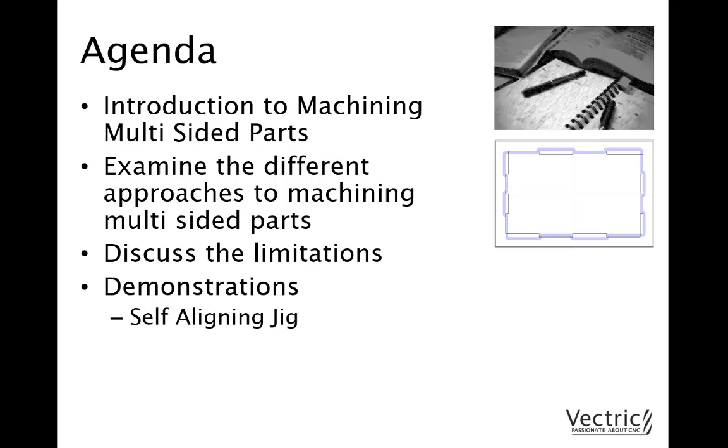We'll have a look at 3 demonstrations: the Self Aligning Jig, 4-sided machining just using 2D toolpaths, and 4-sided machining where we import third-party 3D data.

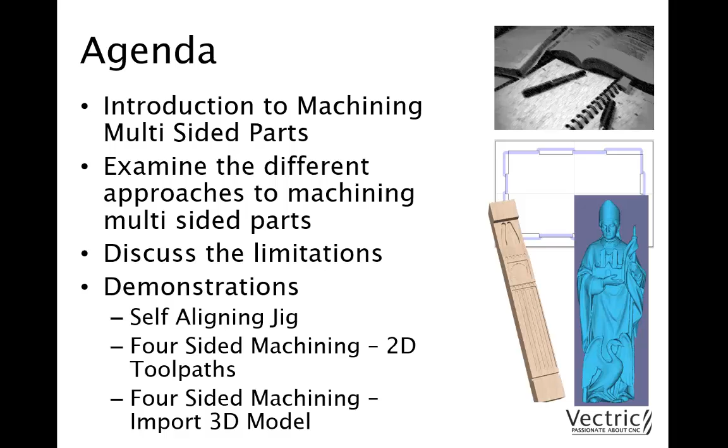So what is a multi-sided part? A multi-sided part is anything that has more than one face. Let's have a look at some examples.

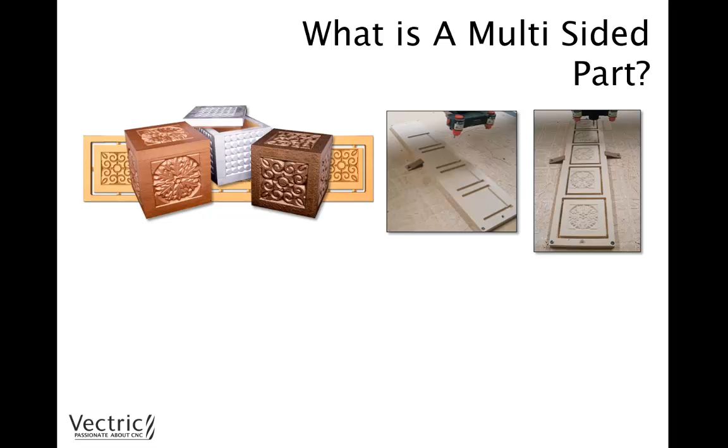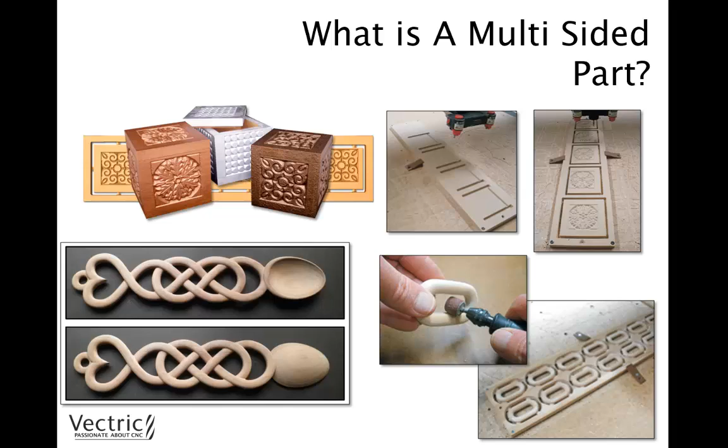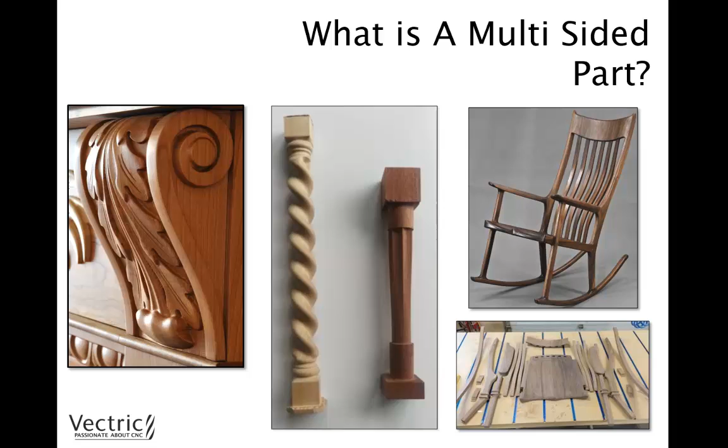Then we have a customer, Russell Crawford, who has kindly posted this on the forum. We actually did a case study with Russell on the Maloof chair. Now this Maloof chair is made up of a combination of single, 2-sided and 3-sided parts and then assembled together. And so you can really see how you can make relatively easy to quite complex looking parts like this using multi-sided machining.

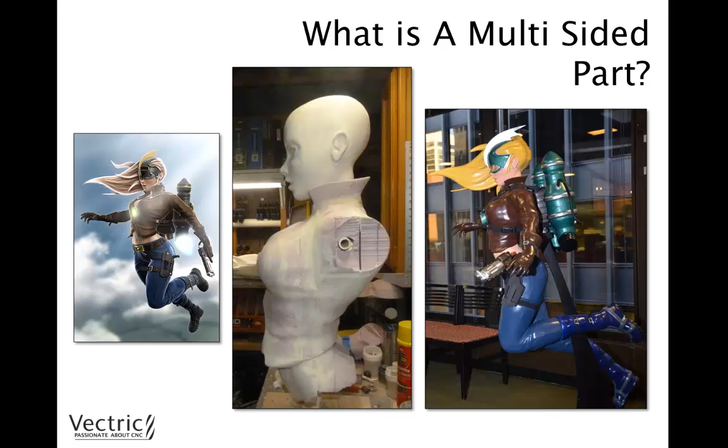So why should we cut multi-sided? Firstly, we're able to make more interesting projects than regular one-sided parts. For example, we can create toys, furniture, household objects. You could also take a standard sign or a plaque and turn that into a 2-sided part, where you add toolpaths to the underside in order for you to fix the part to a wall, for example.

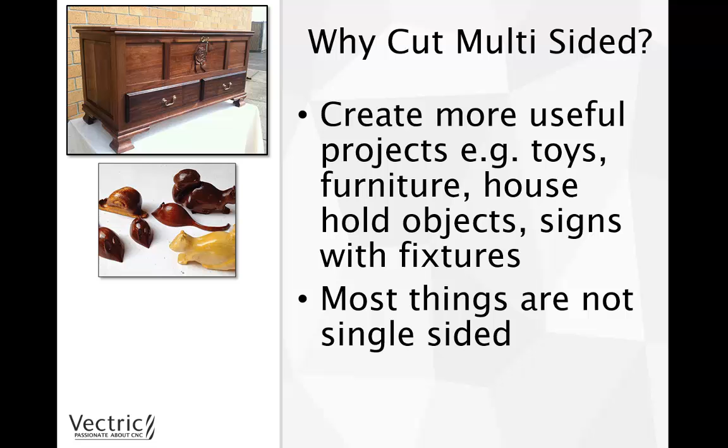Now if you think about it, most things have more than one side. And so understanding how you can approach multi-sided machining makes your machine a lot more flexible. We'll be discussing the different approaches and things to consider with machining multi-sided parts within this presentation.

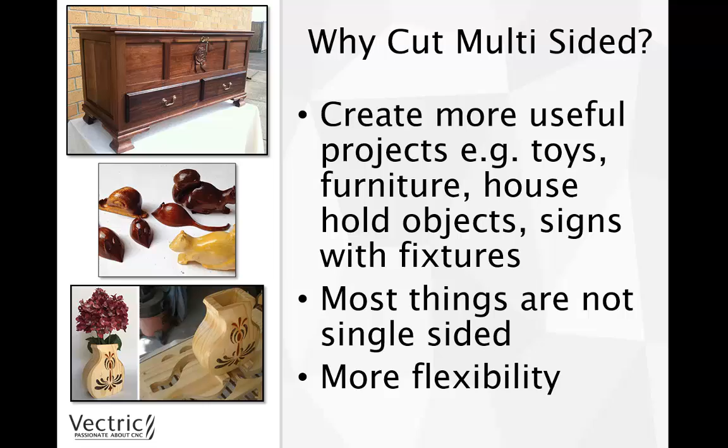Now before we think about how we can tackle multi-sided jobs, let's just take a moment to think about some of the things that we're concerned with when cutting a standard single-sided job. Firstly, we always ensure that the software setup matches the physical setup of the material block and the positions on the machine bed. So we're looking at the size of the part, the material, and our X, Y and Z positions.

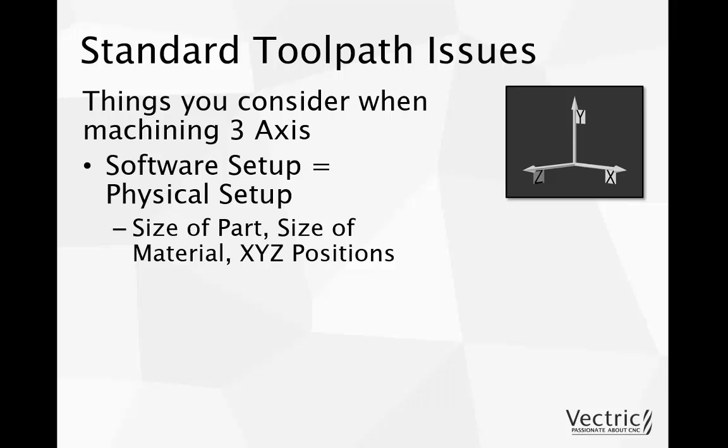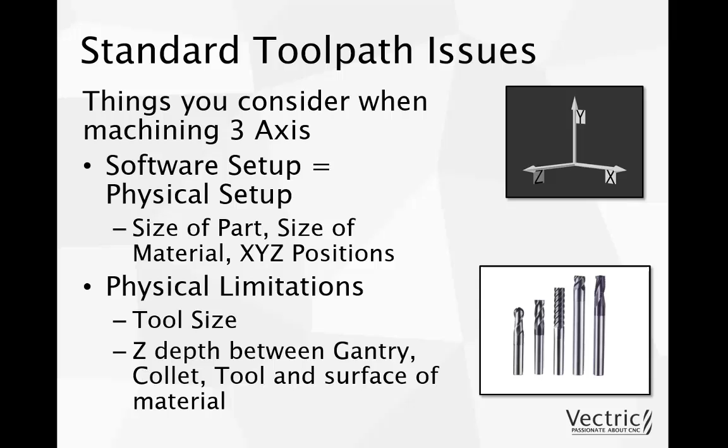Secondly, we think about the physical limitations. So we think about the tools we're using, the size of them, and making sure that they're safe to use with the material that we're working with, where we would consider how much Z depth we have to cut. So what do we need to think about when dealing with parts that have multi-sides?

First is our alignment. So how do we get accurate registration for each side? And more importantly, how can we do that when we can only preview a single side at a time within the software?

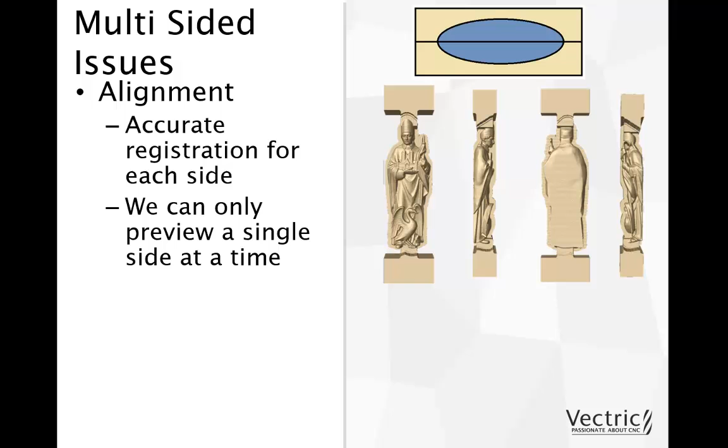Then we need to think about the material. Material is another key thing to think about when dealing with multi-sided machining. We need to think about the size of our material and be wary of the limitations when cutting a block of material—thinking about your tool size and the amount of space you have. Then we also need to think about how we hold the part down.

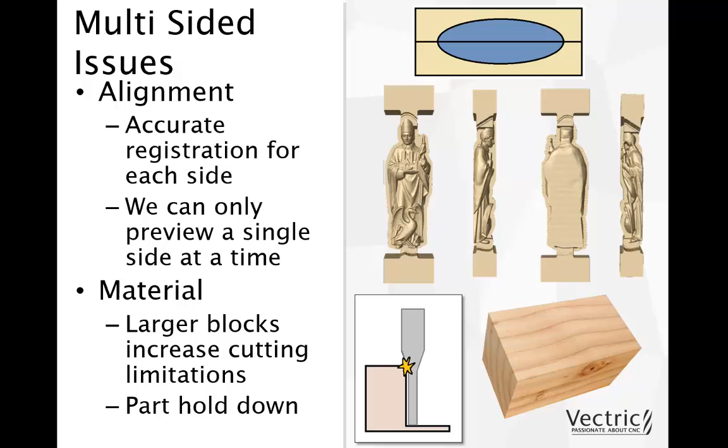We'll be talking a lot about alignment and material with multi-sided parts throughout this presentation with the different examples we'll be looking at. So let's have a look at some of the techniques we're going to be discussing: assembly, wrapped rotary machining, two-sided machining, and then 3, 4, or more sided machining.

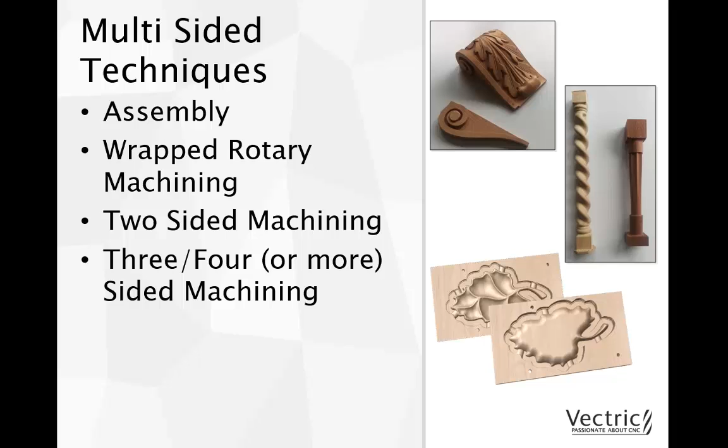So let's have a look at the techniques for assembly. One way is by taking a model and creating a mirrored copy of that in the same session, where we'd cut that out on a single side of a piece of material and then glue the two halves together.

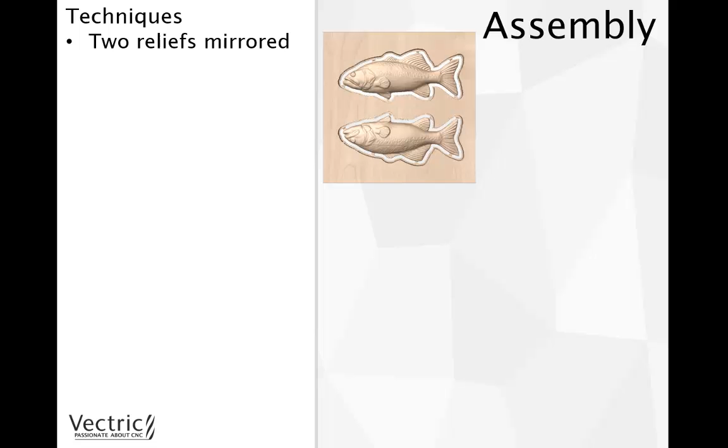Another way, if you remember the corbel we looked at earlier, we could take a part that has a front face and then create sides for that, cut them all in separate sessions, and then glue them all together.

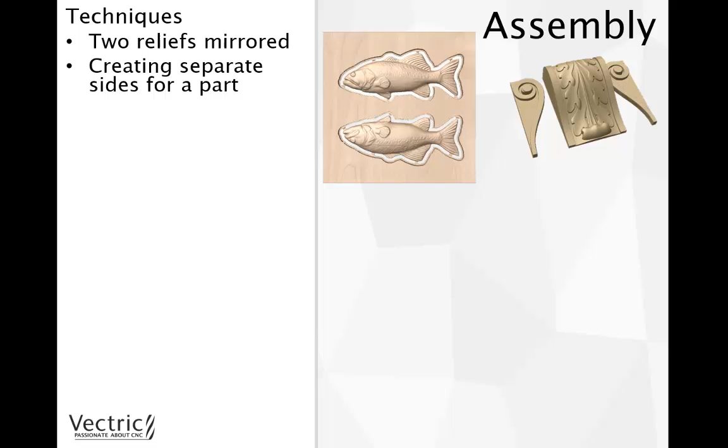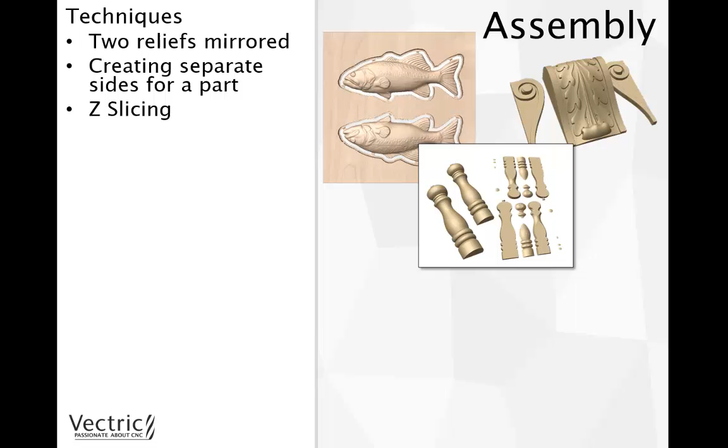Another way we could create full 3D parts is by using Z slicing, looking at the slicing feature in the software, cutting the parts out and then gluing everything back together to get your full 3D model. And then there's slicing using third-party software, which enables you to slice at various depths and angles.

The shark example you can see at the bottom is done by one of our customers, Jamie Oxenham, who uses this third-party software but then brings the slices back into Vectric software to cut that out.

So what are the things to consider with the assembly process? The first is that we can cut it in one operation. However, when we start to assemble or glue the parts together, we may have an issue with the grain match—it's probably not going to match up as you'd want it to. So there's a lot of manual tidying up to do with the gluing process. However, that's relatively easy to just toolpath and glue together.

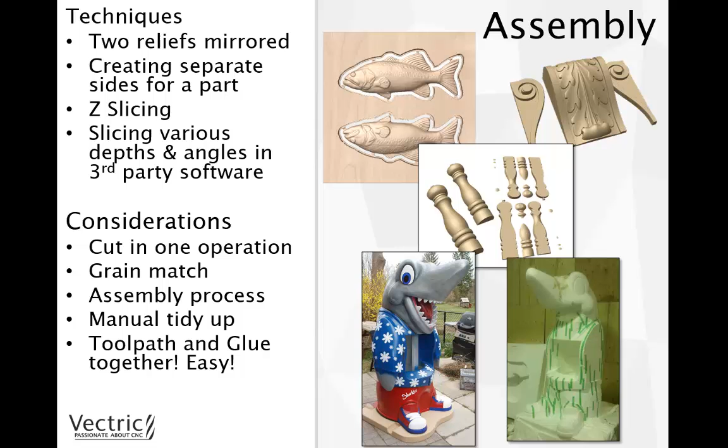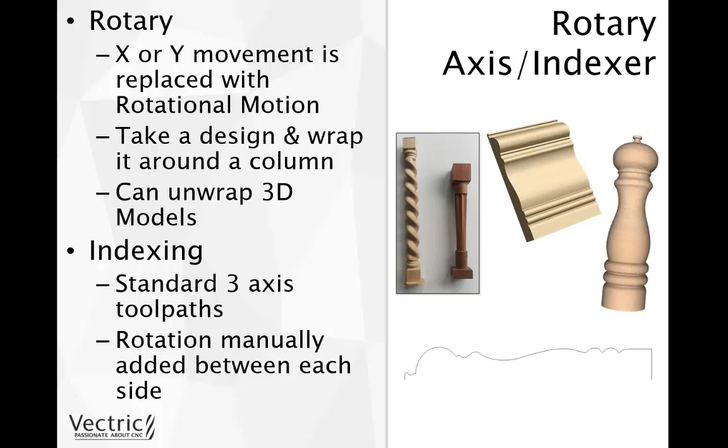Then we have the rotary axis and the indexer. The rotary axis takes the X or Y movement and replaces it with a rotational motion, so you can take a design and wrap it around a column, and you can unwrap 3D models. Indexing takes standard 3-axis toolpaths in which the rotation needs to be manually added between each side.

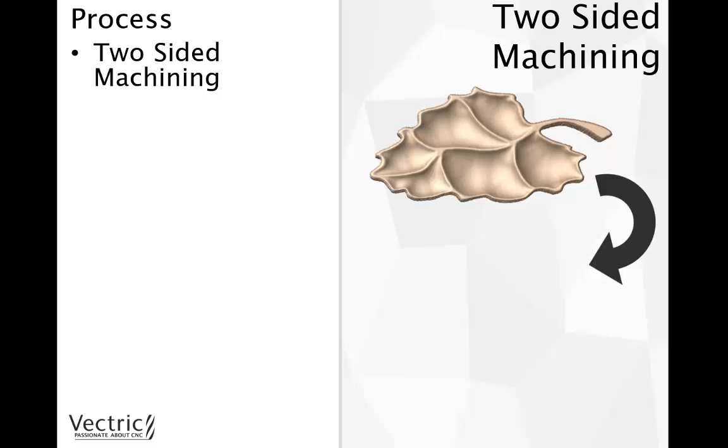Then we have two-sided machining. So what's the process for two-sided machining? This is where we take one side, carve the model into one side of the material, then flip the part over and machine the other side. The key here is to get the correct alignment on both sides. So how do we do that? Let's have a look at some alignment methods.

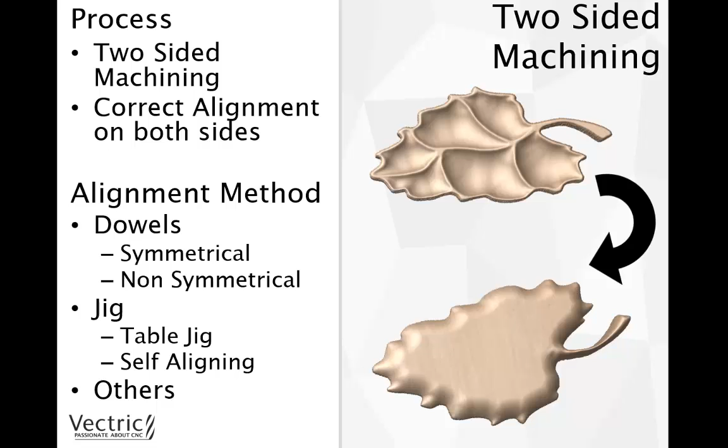One, we've got the dowel method. We can do this in a symmetrical fashion or a non-symmetrical fashion. Then there's also the jig—you could use a table jig or a self-aligning jig. There are probably other methods available, but we're going to look at discussing the dowel method and the self-aligning jig method. So let's have a look at the symmetrical dowel method.

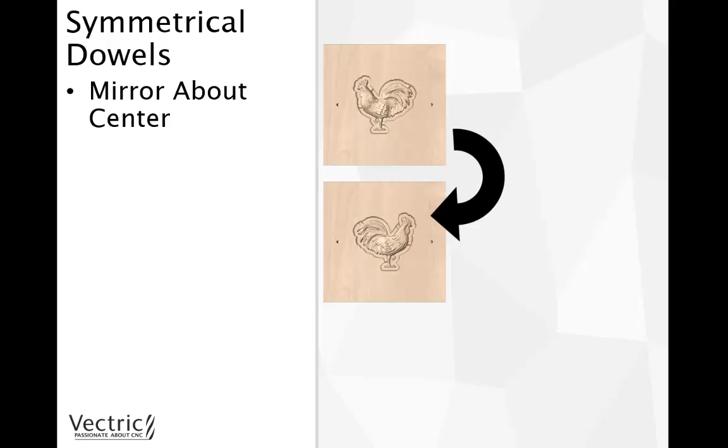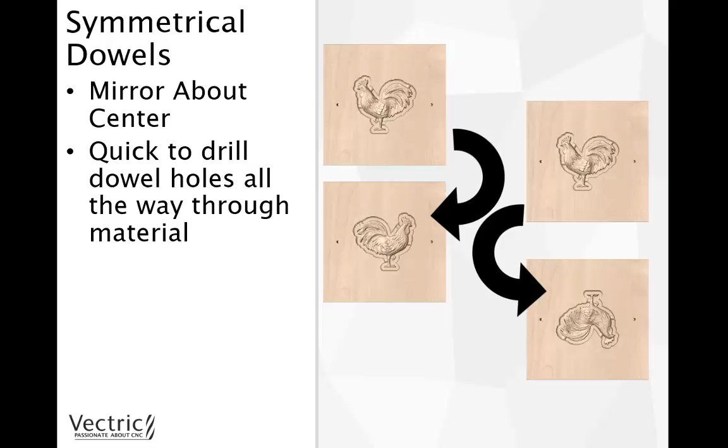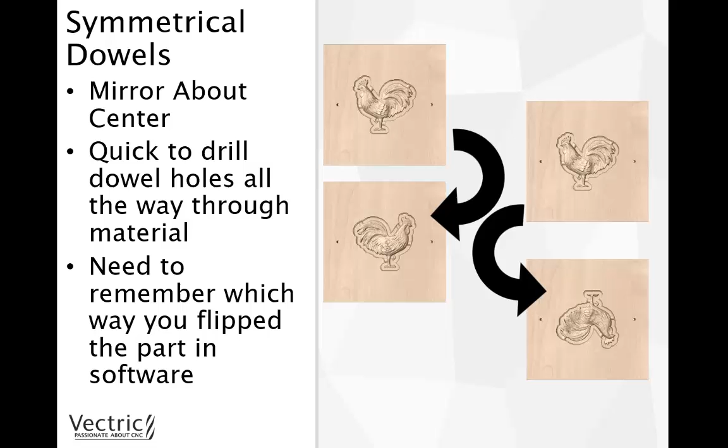The way we do this is we draw circles in the software that represent our dowel holes, and we place them symmetrically in the job. We then mirror that job about the centre to create the other side. This is quite a quick process in that we just drill the dowel holes all the way through the material, but we need to remember which way we flipped the part in the software, and then repeat that process physically with our material block on the machine bed.

Let's have a look at the non-symmetrical dowel method. We start by creating an odd number of randomly placed dowel circles within our job. When we come to create the underside or side B, we mirror everything about the job centre so that we get correct alignment.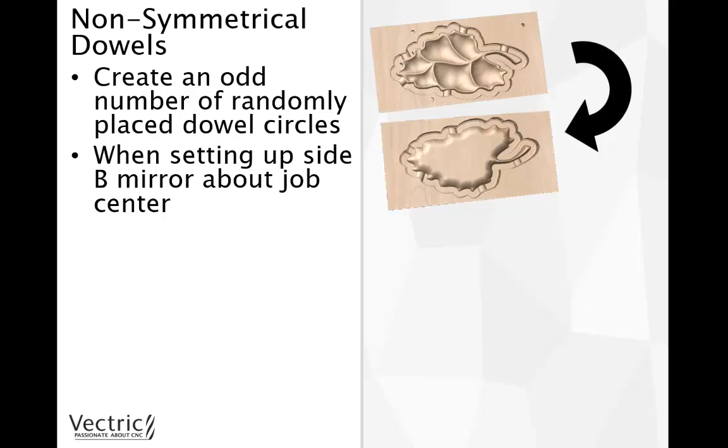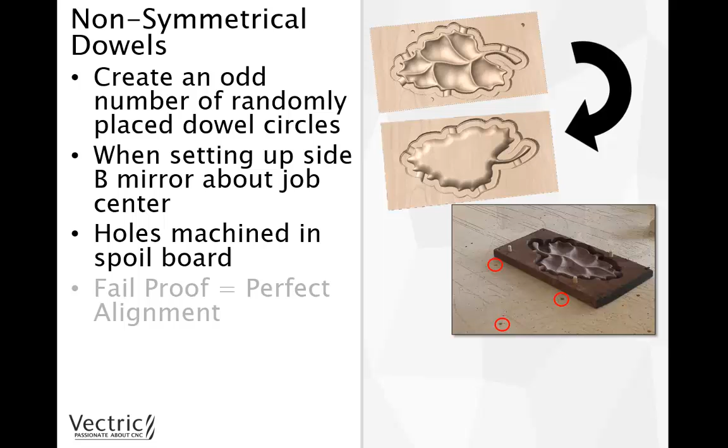In terms of the dowel holes for side A, we partially drill through the material block. Then for side B, with the mirrored dowels, we just machine those holes into the spoil board. You can see in that image the holes within the spoil board, and we can see where the dowels are within our block of material. That allows us to have perfect alignment, and it also gives us the ability to machine side 2 at a later date.

Another way that we can keep our part aligned in two-sided machining is by creating a self-aligning jig.

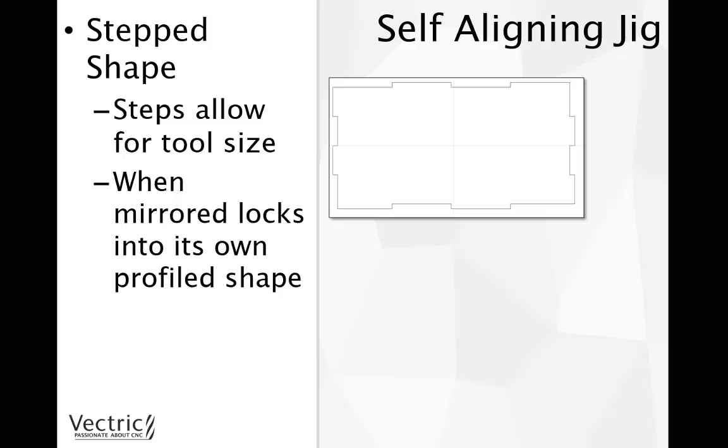Using an asymmetrical stepped shape, we can easily create this self-aligning jig. The key here is that the size of the steps, these areas that stick out, the amount that they step out is determined by the tool that we plan to use. So when you mirror that over physically and flip the part over, it will lock into its own profiled shape.

Let's take a look at this process in action. This video is courtesy of Brian Oltrogge from Grünblau Design Studio. You can access that on YouTube if you search for two-sided soap dish, or follow the link at the bottom of this screen.

You can see that the tool is currently going around creating that profile toolpath, just following the vectors, for example like the vectors you can see at the top of the screen in the image there.

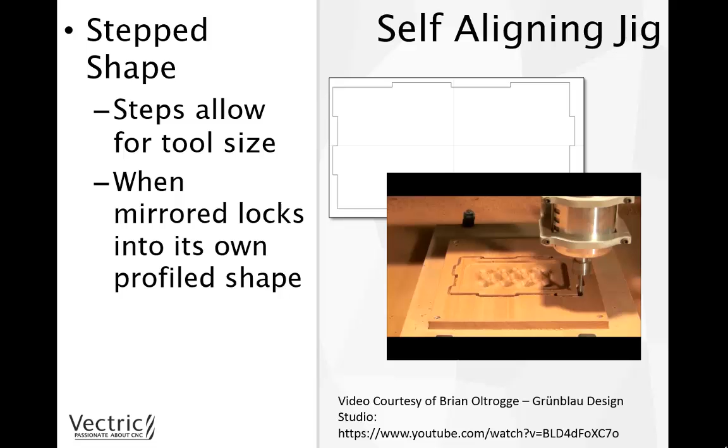Once that's cut out, Brian is going to take that part out, just give that a clean up to begin with, and take the soap dish out, cleaning inside of that jig area. So you can see now we've created this jig shape.

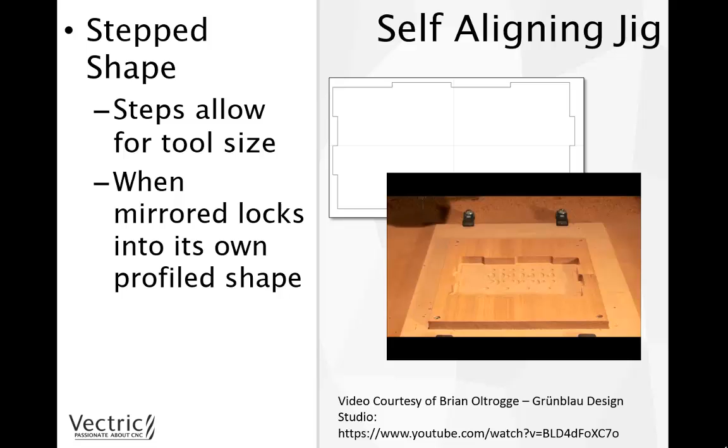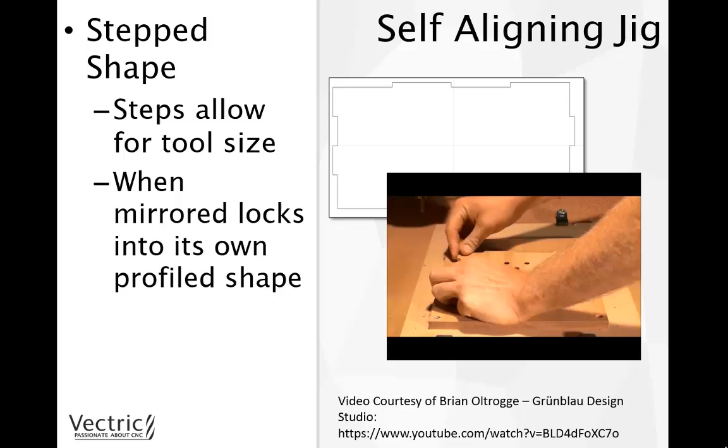What will happen now is we'll put the soap dish in, however we're going to flip that over horizontally. So there's the original side that we just cut, flip that over horizontally, and we can see that it's going to fit snug within that jig shape, just self-referencing.

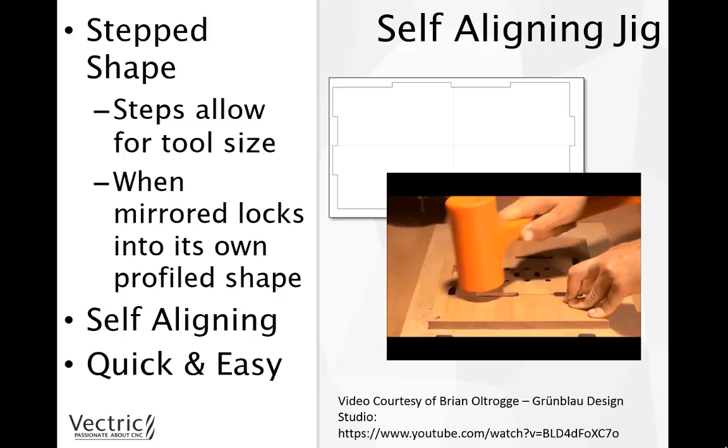This method is just a real quick and easy way of aligning a two-sided part. We're going to look at this in the self-aligning jig tutorial.

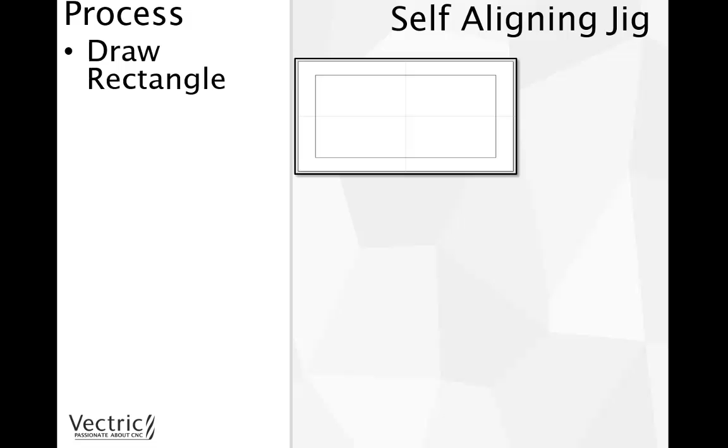In the self-aligning jig tutorial, we're going to start by drawing a rectangle, which is going to form the basis of our jig, using guidelines to help us draw this. We're going to use a 1/4 inch end mill in this case to profile our self-aligning jig, and I'm going to insert some guidelines.

We're going to start by creating guidelines that come out 1/4 inch from each side of our rectangle, and then I'm also going to create some more guides that divide up the jig area evenly so that we can create our stepped shapes.

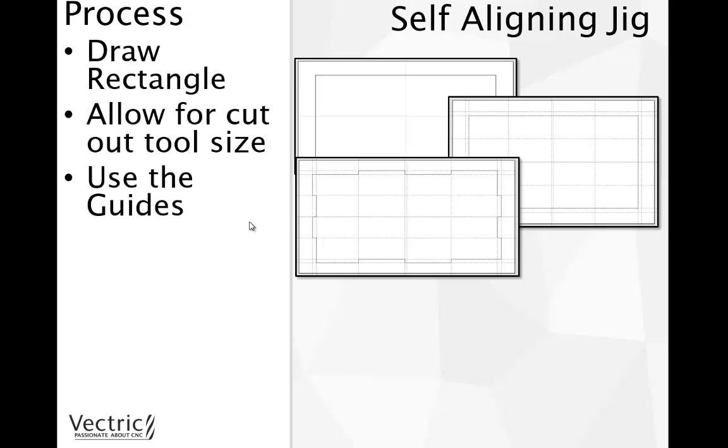We're going to use these guides and start drawing our steps using the polyline tool. Once we've done that, we'll run a profile toolpath, and the key here is to use the solid preview option where we can see the areas that are going to be cut away in the 2D view, highlighted there in this image.

With that preview, what that enables us to do is take the original vector, and then we can use the mirror and flip option, and we can see that that will fit within that profile shape perfectly. This really is a cool and smart way of aligning a two-sided part. So if you're wanting to try this, please go and watch the self-aligning jig tutorial.

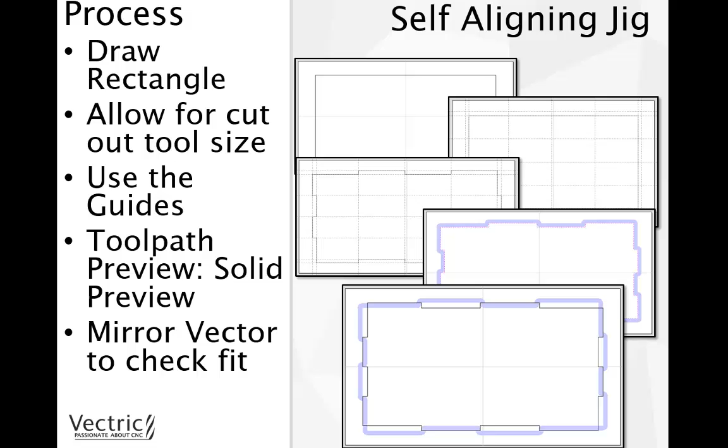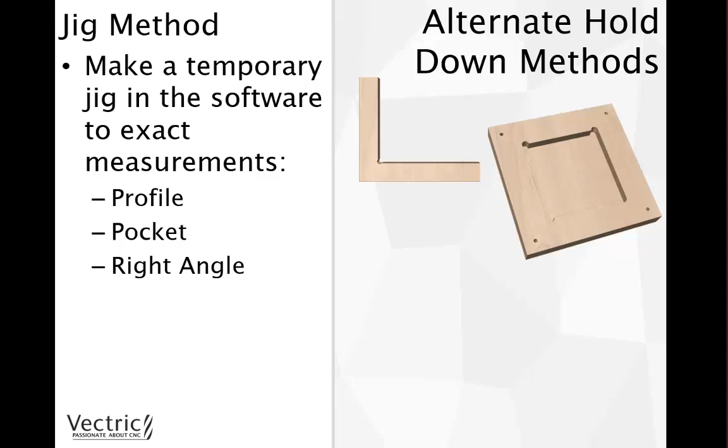So that's one method of using a jig. Other jigs we could use are making temporary jigs in the software, so you can make them to exact measurements. We could look at making profile shapes, or using the pocket toolpath to create a pocket to the size of your block of material, for your block to sit within. The tutorials I'll be demonstrating will use this method of using the pocket to create our jigs. Then there's right angled jigs, and fixed jig position on your machine.

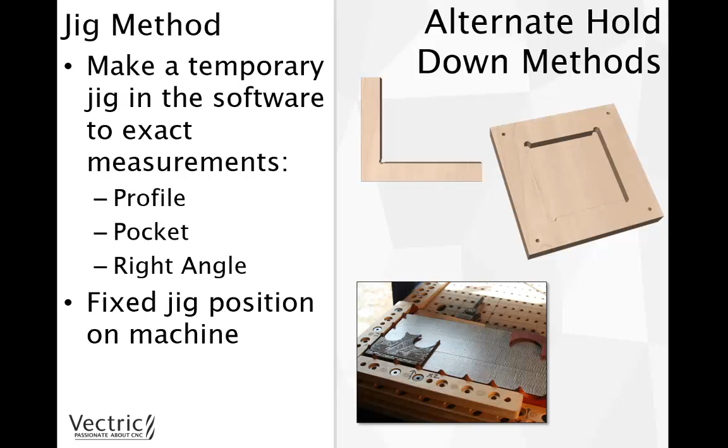So far we've spoken about assembly, how we can assemble parts to create multi-sided parts. We've also looked at rotary and two-sided parts. Let's have a look at multi-sided parts, so anything that has more than two sides.

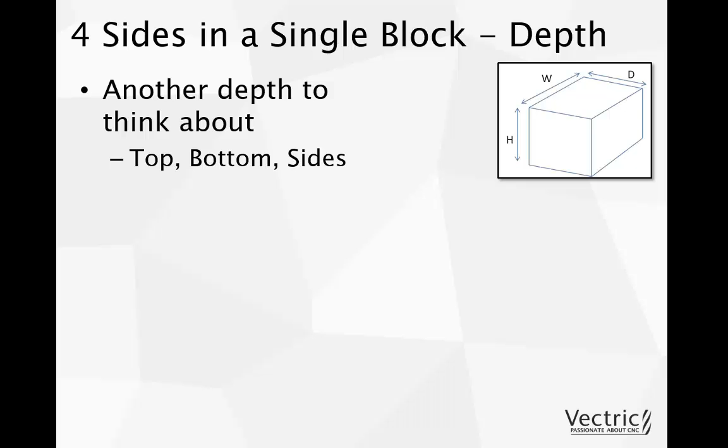The main difference when working with multi-sided parts is thinking about the depth. When you introduce another side, you've got another depth to think about when you turn that block of material on its side. We need to always think about the depths of our part, and ultimately think about whether that's going to affect our tool access limitations.

Because once we've turned a block of material over, this could be the highest depth we're working with, because that was ultimately the width of one face, and now we've turned the block on its side, that width becomes the height. So we need to think about things such as the tool access limitations, your material height, and especially the z-depth between the gantry, the collet, the tool, and the surface of the material.

We'll be discussing some of these things within the St Hugh tutorial, as this demonstrates how when you turn a block of material over on its side, you now have a lot more height to work with. So we need to think about ways we can overcome the amount of space we're working with for our tool to get into, to ensure we're doing safe cutting.

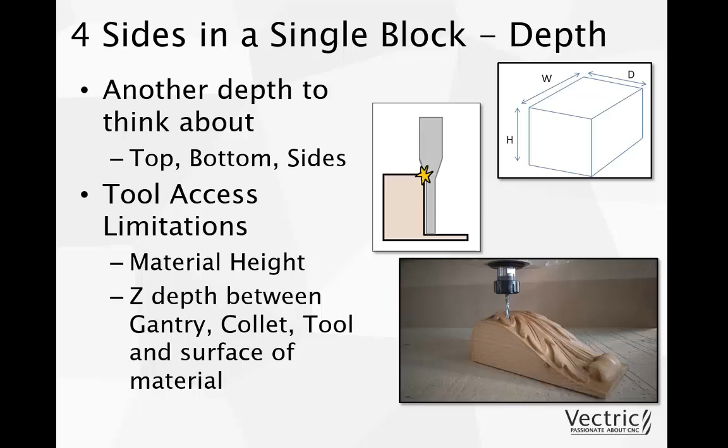Next thing we need to think about is our alignment. How do we get correct alignment when we're working with more than two sides? The key here is, to begin with, to machine your block of material to the exact size, or just about the same size as the parts you're planning to cut. This ensures that when we have this block, we can work out what jig we can create in order to get the correct alignment, which we'll talk about shortly.

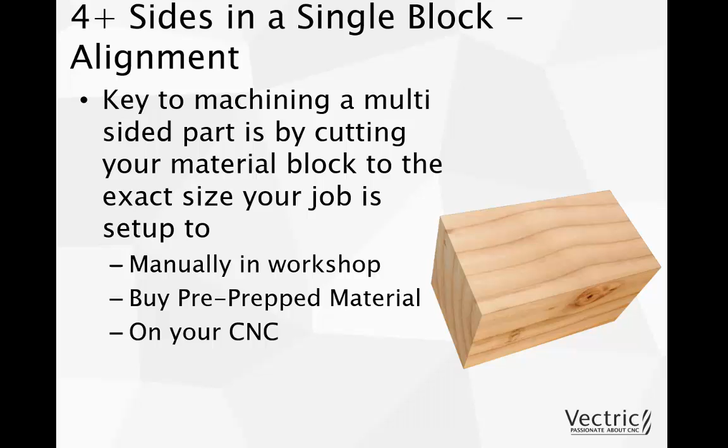So how can we get our material block cut to the exact size? You could do this manually in the workshop, or buy pre-prep material, but the most accurate way is by doing that on your CNC machine. You could look at planing the material down and then running profile toolpaths to ensure you get the exact dimensions of the part you want to cut.

So how do we keep the part held down and keep everything aligned? Well, the best way I've found is by using a pocket jig. We'll be discussing how we create these pocket jigs in the Clock Tower and St Hugh tutorials.

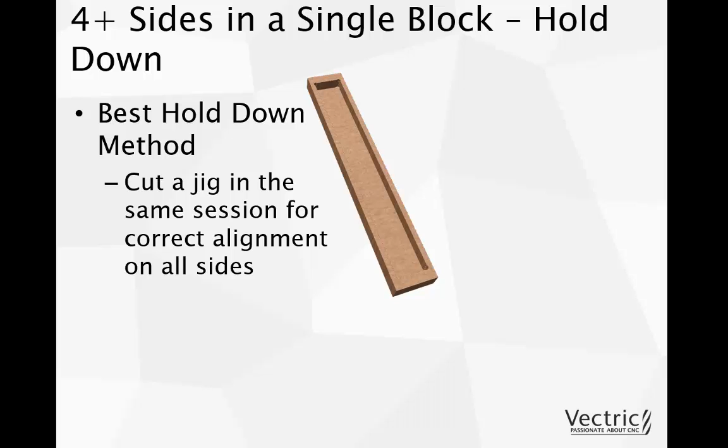So what we know already is our block of material that we're working with. As mentioned, we need to work with accurately sized material. That block of material we're going to work with will determine the size of our pocket. We want to make that exactly the same size as the material we're using in order to create our pocket.

We also want to make sure we set our XY positions in the same position for our pocket as with the file we're working with. Again, you'll see that demonstrated in both the Clock Tower and St Hugh tutorials that follow this video. That is the key for getting everything aligned.

Once we've got our XY position set up, say we've got it in the lower left hand corner of our pocket here, we're going to set that up exactly the same for our file. That's going to be in the lower left hand corner here. So every time we turn our block of material over, everything will be aligned, because it's all referencing from this lower left hand corner where we cut our pocket from originally.

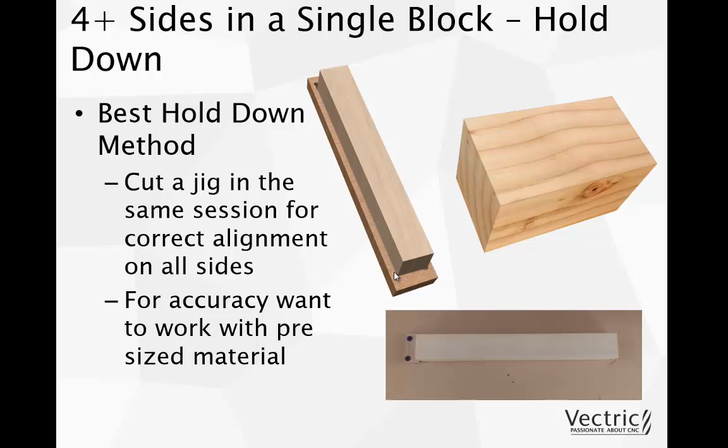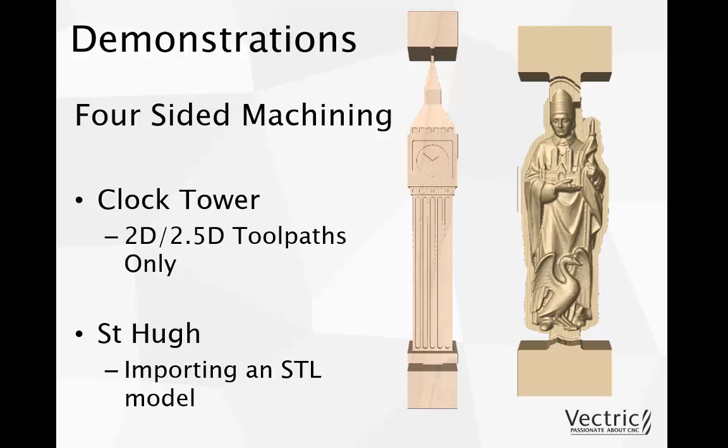So now we're going to look at two tutorials that follow this video - four-sided machining. One tutorial is called Clock Tower. We'll be looking at creating this clock tower you can see here, a full 3D model created just by using 2D, 2.5D toolpaths alone. We'll then look at how we can create this St Hugh model, a full 3D model with four-sided machining, and we'll look at how we import the STL model and set up everything along with the toolpaths to create the full 3D part. So let's begin by looking at the clock tower.

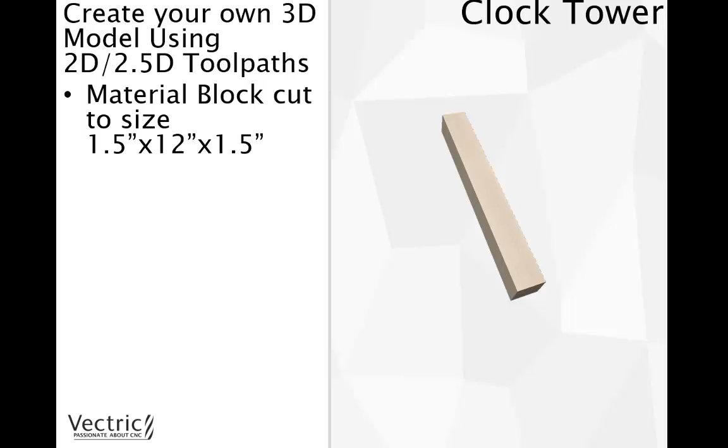So as I said, we're going to look at creating a full 3D clock tower just by using 2D, 2.5D toolpaths. How are we going to start this? We're going to work with a block of material that's 1.5 inches by 12 inches by 1.5 inches. That is the first key point to remember here - that is the exact block we're working with. So we're going to open the vector file and walk through some of the vectors.

One of the key vectors we point out to begin with is the pocket. You can see this pocket going around the outside of our job setup. This job setup represents the block of material we're working with. So we must create our jig first - this is our jig, and we talk through this in the tutorial. The idea is that we then go ahead and cut that out, and our block of material sits inside of that jig. Once we've created that pocket and our block of material is in there, we'll run the toolpaths to cut the part out - well, at least cut one side of our material.

And because we've set everything up exactly the same for our jig along with our file, where our XY is going to be in the lower left hand corner here, this is the key to getting everything aligned. So we must make sure that XY is at the bottom here in both the pocket, because we create the pocket in a separate session to the file ultimately. Well, we create it in the same session, however we just save them out as two separate files.

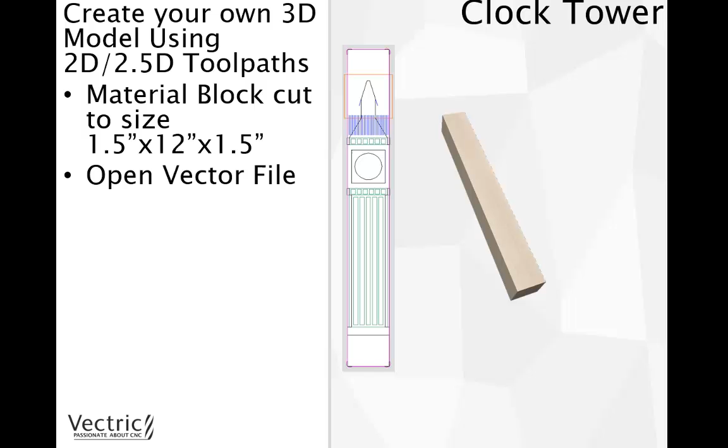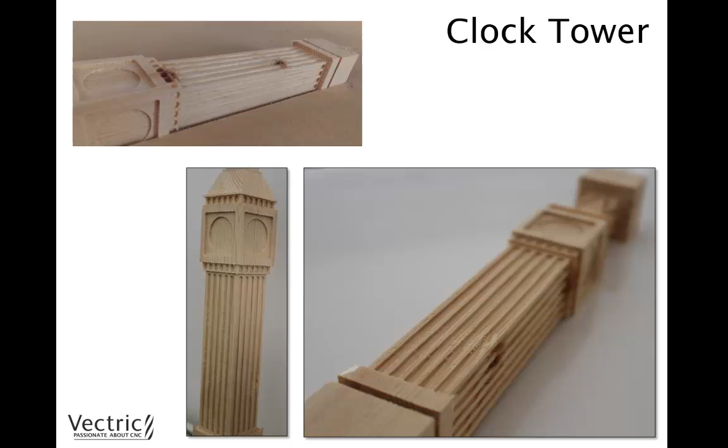Okay, and so then what we'd do is we'd run those 2D toolpaths, and then we'd look at manually hand finishing the tower, and this is the finished part. So you can go to that tutorial now if you wanted to. So that's the clock tower tutorial. So now let's have a look at another example of four-sided machining. We're going to look at St Hugh. So this example, we're just going to be looking at importing 3D data.

So we're going to start by setting up our material. Now we're working with a material block, again pre-sized. I've already cut this out on the CNC machine. It's 3 inches wide, 12 inches long, 1.5 inches thick. Okay. And so the first thing we need to do is make sure that we create that pocket. So we're going to use the jig method again. So we're going to create the pocket at 3 inches wide, 12 inches long, and then we're going to pocket that out in a separate session.

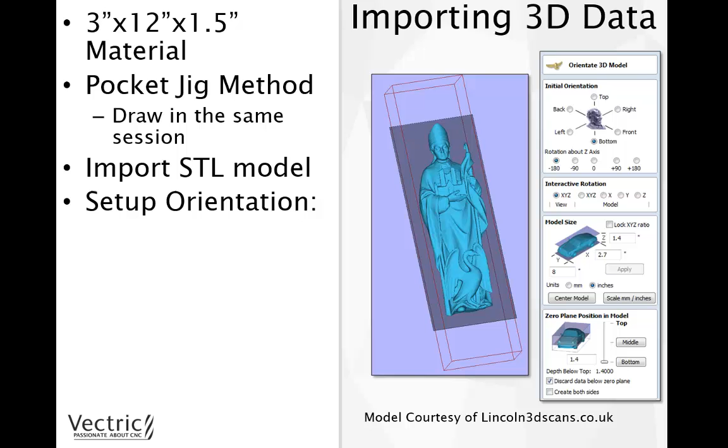And then in our session for St Hugh, we're going to import the STL model. Now this model is courtesy of lincoln3dscans.co.uk, so you can access that there. It is also available in the project folder as well. And so once we've imported the STL, we need to set up our orientation. So this is where we look at positioning the model within the virtual material block. And so this is where we decide whether we're going to use the top, the bottom, the right, front, back or left. Then the most important thing in this example here is setting up our model size.

Now we know that we're working with 12 inches in length, so that's going to be our longest point, but we're not going to use all of that 12 inches because we want to make sure that we have areas at the top and at the bottom here that are untouched in order for the block of material to remain in contact within that pocket. Okay, so that's important that we have these contact points at the top and the bottom. So we're going to go with a Y value of 8 inches, the X is going to be 2.7, and then we're going to have a Z value of 1.4.

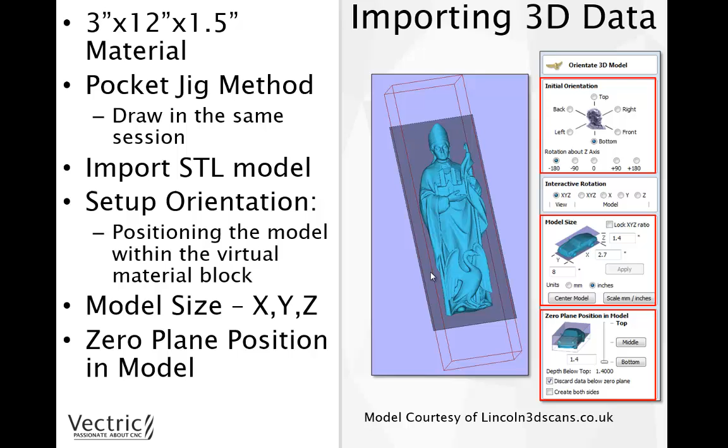Okay, so we're having that 2.7 just to ensure that we've got some space to cut around the side of St Hugh, and then the 1.4 is the position of the model within our material block. So we're going to have a gap above of 0.05 and a gap below of 0.05, and this will all be explained in the tutorial. And then we're going to position the zero plane within the model and push that all the way down to the bottom so we have the whole of the front side of St Hugh visible.

So once we've got St Hugh in place, we need to add rectangular tabs to the model to hold the model to the material block. And so we'll be looking at the 3D tabs, and you have access to a folder in the project folder called 3D tabs that has all of the different component tabs that we can use to do two or many-sided machining with.

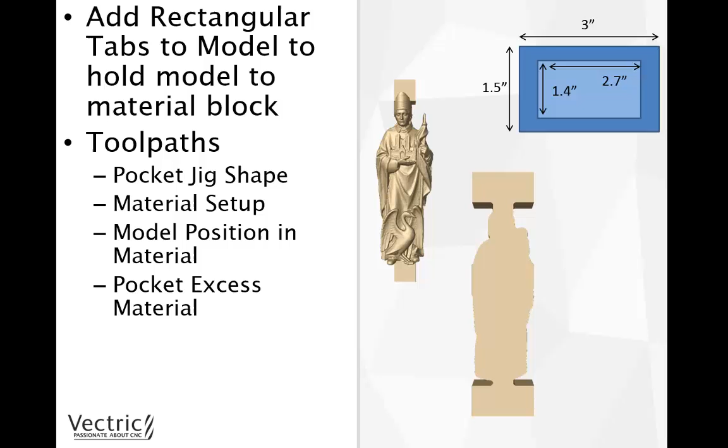Okay, so we're going to hold him in place using those tabs, and then we're going to run through the toolpaths. So we're going to look at pocketing the jig shape to begin with. We'll look at the material setup for St Hugh. So we'll make sure that he's set within the centre of our material. Then we're going to go and look at pocketing that excess material around the side of St Hugh just to remove that.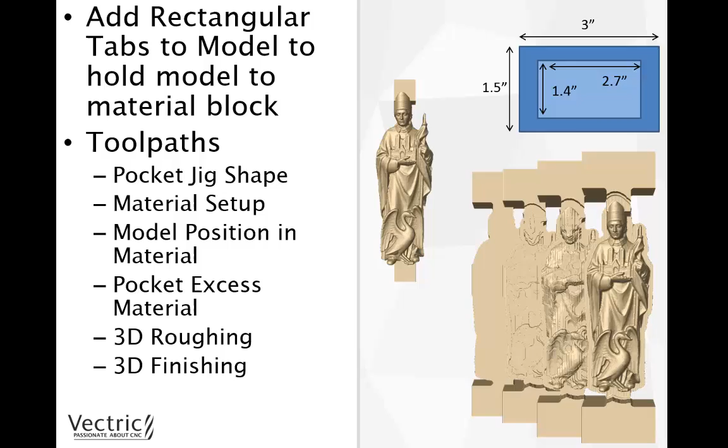We'll look at running a 3D roughing toolpath along with a 3D finishing toolpath, and that is the first side complete. So then what we'd do in the physical world is take that block of material and turn it over 180 degrees so that we have the back side showing. Now in the software we need to think about doing the back side, so we need to open up a new session for the back.

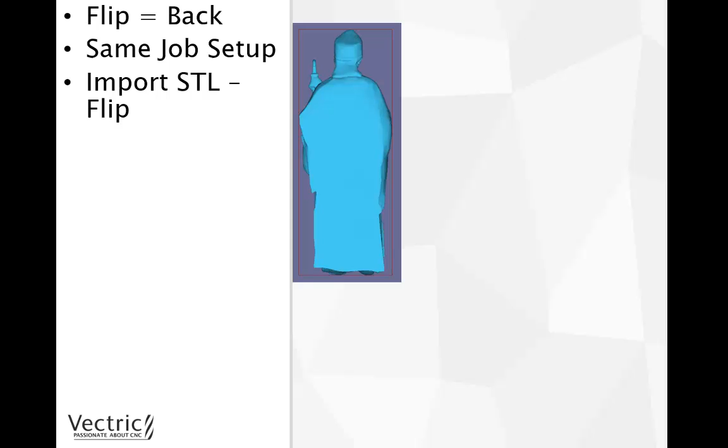I'm going to work with the same job setup. I'm going to import that STL model. Okay, so we're going to go through that orientate model form, and then we're going to add in those tabs. We're just going to copy the tabs from the top side and paste them into this session to get the correct alignment for the back side. And then again, we're just going to go through those toolpaths. So we'll look at the material setup, model position within material, we'll run 3D roughing and a 3D finishing toolpath to cut the back side of St Hugh.

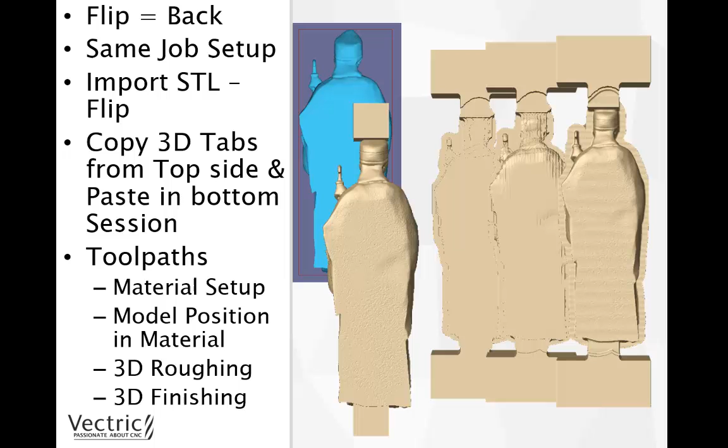So that's the top and the bottom all done. So now I need to think about cutting the sides of St Hugh. What we need to do is physically turn the part over 90 degrees, and we need to do that in the software as well. So we need to create a new job, but we're going to change the job setup. So now where the depth was 1.5, that is now the width of the part. And where the width of the part was 3 inches, that is now the depth. So we need to change those.

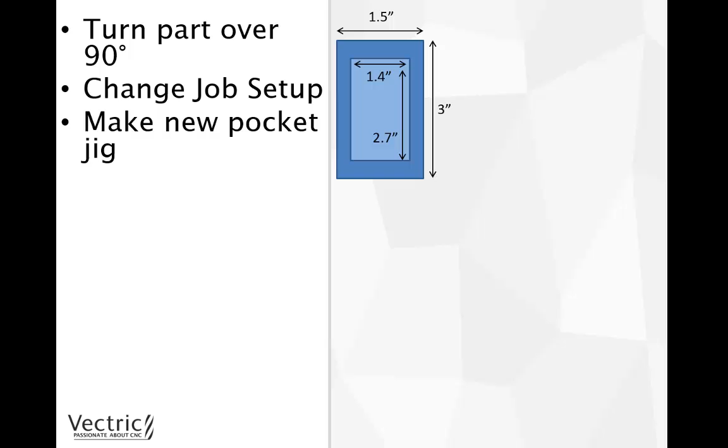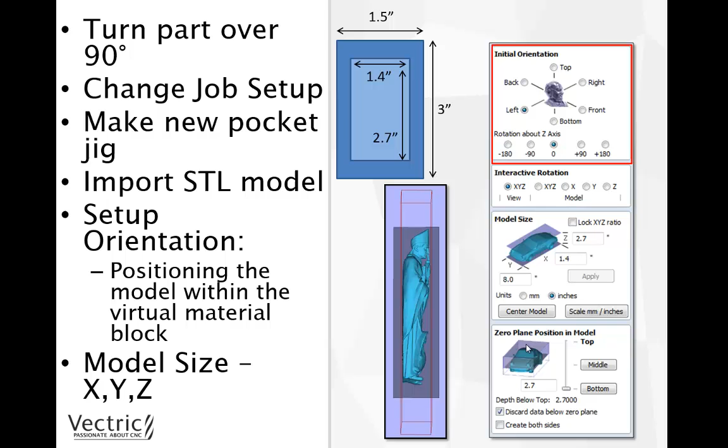And then we also need to make a new pocket jig, because we can't use the jig we've already created because that's going to be too big for the side of our block of material. So we need to create a brand new jig exactly the same way that we created the jig for the top and the bottom. Then we'll import the STL model. We'll set up the orientation, so looking at the left or the right this time. Again, we're going to make sure that the model size is all exactly the same. However, we just need to account for the depth changes. So the depth is now 2.7 and the width is now 1.4. Zero plane right at the bottom again, and then we could position the tabs to match the front and the back sides.

Now one thing we need to think about is now that we've turned our block of material over to its side, we now have the depth at 3 inches, and that's quite deep for most regular tools. So we need to think about this sort of limitation and how we can overcome this. The way we're going to do it in this session is by adding a zero plane that's going to come up halfway. So we're going to make that 1.35 inches. So we're just working with half of the side, and that means that the tool should be safe enough to come down and cut half of the side of St Hugh. Okay, so that zero plane is there just purely to accommodate for our tool limitations. So we have to think about all of these different things.

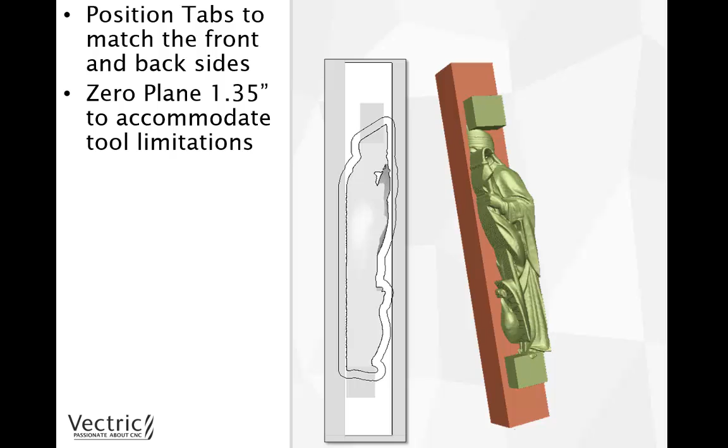We'll then run through our toolpath setup. So again, model position in material, going to make sure that that matches up to what we've done on the top and the bottom, making sure that that is in the dead center of our block of material. We're going to run a 3D roughing toolpath and a 3D finishing toolpath, and then we'd essentially repeat the same process for the flipped side, and you'll see all of that in the tutorial. So I've just quickly run through the process here, but the tutorials do demonstrate everything in a lot more detail.

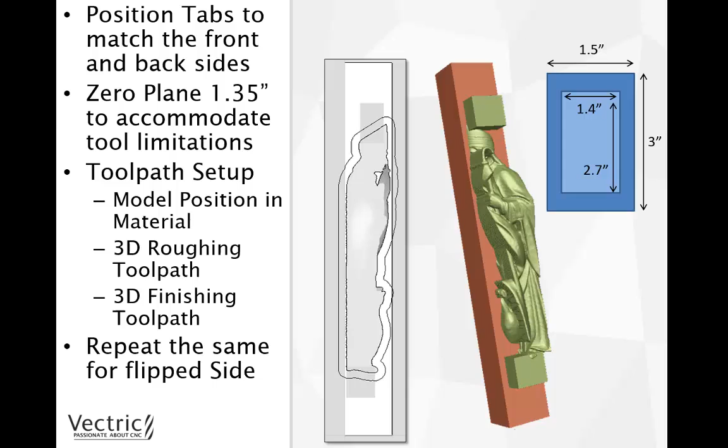And so that completes this presentation where we've looked at lots of different approaches to machining multi-sided parts. We've looked at how we can assemble parts to create a multi-sided part. We've looked at various different ways to do two-sided machining. And then we've moved on and looked at how we can create four-sided parts, using just 2D toolpaths to create the clock tower, and then how we can import an STL model to cut the full 3D model of St Hugh.

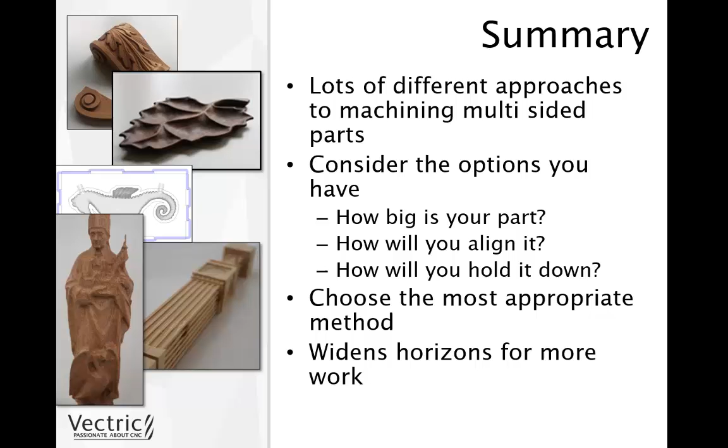And so multi-sided machining is actually quite easy once you consider the options that are there. You've got to think about how big your part is, how you are going to align it, and how you are going to hold it down and keep that part aligned. So choose the most appropriate method for you. And this really does widen the horizons for more work. You can create really interesting projects by introducing more sides to your parts. So go play and push the limits.